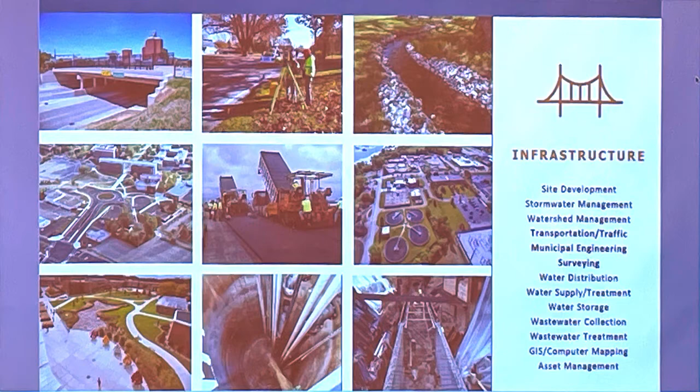As I mentioned with infrastructure, you can see a snapshot of the different capabilities within that division. The transportation and traffic, municipal engineering, and surveying groups all played a role in the work that led to our report for this assignment.

As a means of background, the work I'm aware the city performed prior to Fishbeck's involvement had to do with an accessibility survey published by Disability Access Consultants in October of 2019. They performed a survey of the two blocks of Louisiana we're talking about, and also issued a report, a copy of which I have here if you're interested.

They went through and developed a lot of the deficiencies noted within this corridor, and also provided an estimate of costs for some of the items they were recommending. That report served as the background for the City of Perrysburg's RFQ that was issued, to which Fishbeck, among others, responded in the fall of 2021.

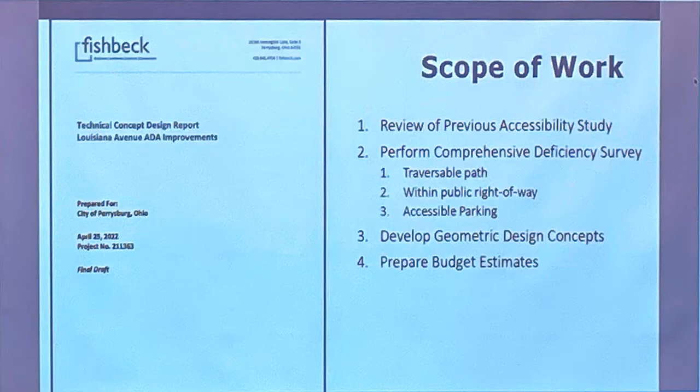Our deficiency survey was to focus on the traversable path. We were asked to focus on the public right-of-way alone, from building facade to building facade. Our contract was not to perform any sort of architectural renovations and how the buildings might be modified.

It was also not to look at the access beyond the public right-of-way, which in this case was the actual building line itself. So that's what we did, we were focusing on just public right-of-way. We were also asked to look at the parking, specifically the diagonal parking along these 2 blocks, and how the accessible parking spots could be modified to bring them up to current accessible standards.

As a result of all that field data, we were then asked to develop 2 different geometric design concepts. One we considered more of a base option, a minimalistic approach to dealing with the accessible issues on the corridor. The second option, which we called an advanced option, went into much greater depth on some of these items.

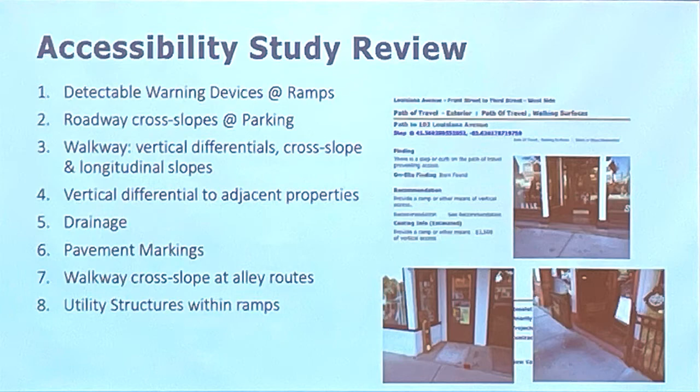We found that to be the case and would confirm that as well. Utility structures within the ramps were identified in many locations—manhole covers, utility handholes, things like that—right in the area where the crosswalks and truncated domes, or the detectable warning devices, are located. That is also a violation of current standards.

With that review completed, Fishbeck went out and performed our own survey in a much more comprehensive fashion. We had the benefit of the disability access consultants' work. Myself and another engineer went out there and did an inventory of the entire two-block corridor.

Furthermore, we employed one of our pieces of equipment called a terrestrial scanner. We were able to scan the horizontal surface of all the sidewalk and provide a heat map showing where the differentials were. So I can tell you with a pretty high degree of certainty where we had steps that exceeded a quarter inch, or where we had settlement of a piece of sidewalk causing a small puddle of water.

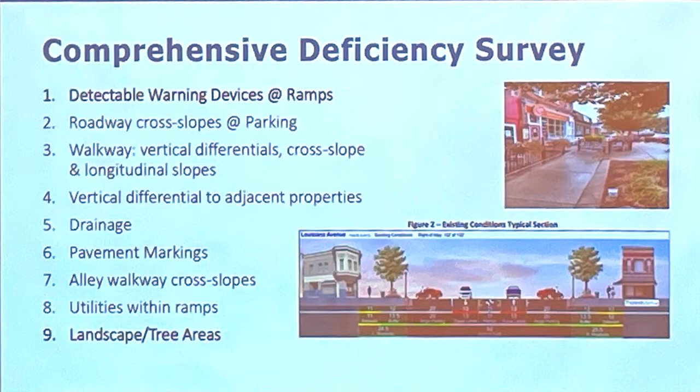Number 9 is one I wanted to include also. It isn't directly related to accessibility, but I think it's important to recognize that the larger trees and tree planting areas are much bigger than you'd typically expect in an environment such as Louisiana. Because of that, it's posing additional constraints on what we could do within the sidewalk to make the area accessible. I wanted to make sure everyone understood that even though we're focusing on the vertical differentials of the walk, we took a wider look at what the real constraints are.

I'm going to share a few slides with examples where the problem is over here, but the solution is over here. That's an example of going a little beyond the basics to try to arrive at a solution.

Looking at the cross section, we have roughly 25.5 feet of sidewalk area between the curb line and the building facade. The typical section is symmetric. You also have an 11-foot multi-directional left turn lane that provides access for that. This section provides a lot of opportunities and could also be used to our advantage should the city decide to move forward.

When we talk about a comprehensive deficiency survey, I felt it was important, since I know there's a lot of interest in these ramps and accessible paths, to share these two exhibits I took from the U.S. Access Board's ADA accessibility standards. This focuses on providing information you may not already be aware of.

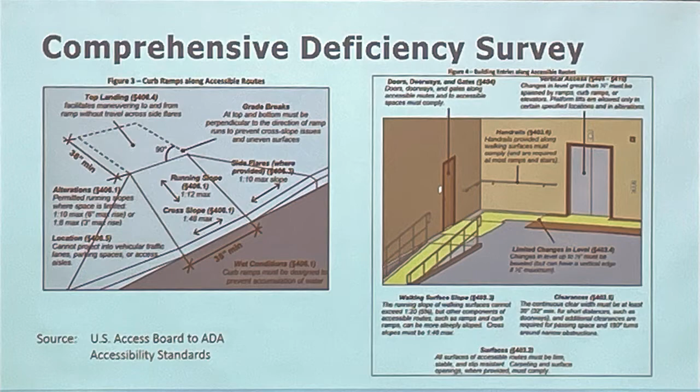In the gray area, limited changes in level. We had several instances where the disability access consultants indicated the vertical differential was 3/8 of an inch, and they marked that as deficient—which it is, because it exceeds the 1/4 inch allowed for a vertical differential. However, this section allows you to grind that corner. Say you're at 1/2 inch, you can grind it down to a 1/4 inch vertical with a beveled edge. That's allowed based on the standards.

So you may have seen sidewalks with a slight differential between pieces, where we've gone in and ground that surface. That's what we're attempting to comply with—we want the sidewalk to maintain its function as an accessible route, but we also recognize we can't have a vertical differential greater than 1/4 inch.

The last item talks about clear widths—36 inches, 32 inches on doorways. I mentioned earlier that our scope wasn't to look at the actual building itself, so I didn't take measurements to doorways and things. I don't know where we stand on some of those—we may have doors narrower than 32, or many much greater than that. I can't comment on the building itself; that wasn't what we were contracted to do.

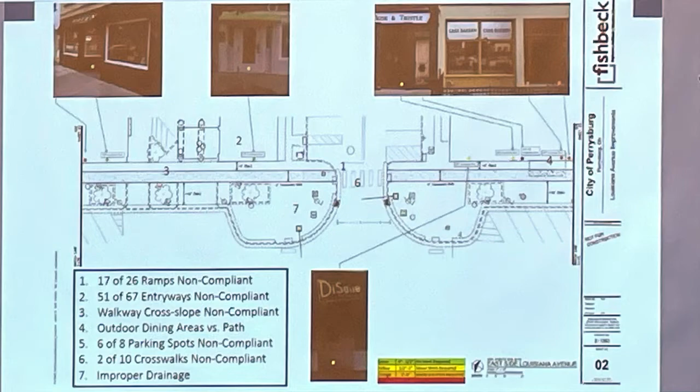When we got in excess of 3 inches, we got to 3 to 8, and in a few locations we have even greater than 8 - which, just as a quick aside, is also taller than what the Ohio Building Code would require for a stair riser. Typically you see risers 7 inches, 7.5. When you start getting into 8, 9, 10, that becomes very uncomfortable to navigate and relatively unsafe.

Couple other items - just to show you in this case, all along Cellos and Zingos and that area, coming up to Front Street, all of these entries were in that orange category.

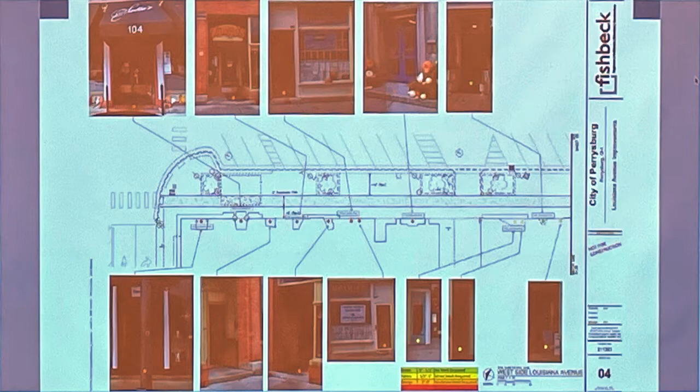So after we had all this data, I came through and tried to figure out, okay, so what do we do with the data? How do we go forward with this? How do we come up with some design criteria we can utilize to create recommended solutions to all of this item.

I tried to summarize side by side, as we were going through this, what was our philosophy behind the different options. On concept number 1, the base design, we were dealing with isolated ramps and landings. We were treating each of the entries that had a deficient vertical differential on its own merit - we weren't trying to combine multiples. We were trying to minimize the amount of work needed to just address the specific ADA accessibility item.

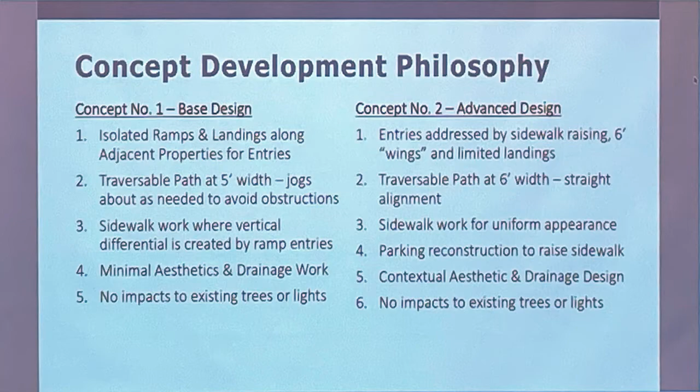Sidewalk raising, in the next slide I'll show you kind of what we're driving at there. But the wings, what I mean by all that is that between the edge of the traversable path and the building facade, we have 12 feet. So we can put in a 6-foot traversable path, and then we have another 6 foot between the traversable path and the building facade, which I affectionately call the wings. So we have a traversable path running straight down the sidewalk, and then on either side you can go up or down with your sidewalk because you're not impacting the traversable path. As soon as you want to turn and leave that pathway, that's where your 5% comes into play.

In this option, the traversable path was established to maintain the 6-foot width, and we best fit a straight, uniform traversable path through the entire 2 city blocks. The sidewalk work was much more extensive, done primarily to address some of the vertical differentials, but also to create a uniform appearance.

There's several examples out there today where it's concrete, but some is white, some is gray, some is dark gray, and it all has to do with there may have been some utility work done, which there was. We had some new gas service lines put in, and they repaired the concrete walk, but the concrete they used to repair it didn't look exactly like the concrete that was there before, and it serves to detract, in my opinion, with the look of downtown.

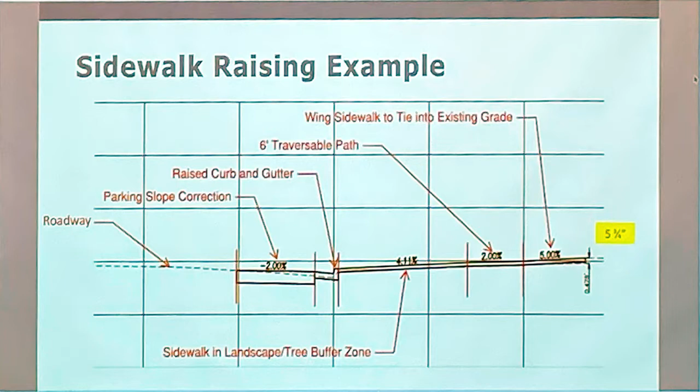But this is an example, so for your purposes there, that 4.11 and the 5.0, those numbers can change as you go in to refine what you're seeing there.

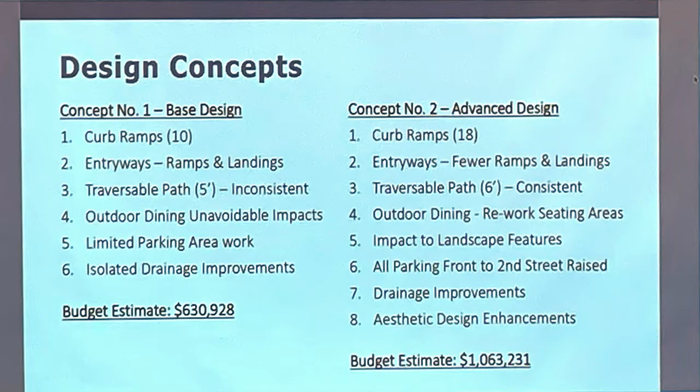This is what we came up with for the work items for the two different options: 630, a little over $1 million for the other one. Just for your purposes on scale, that budget estimate for option 2 has about 20% of it in for what I call contextual aesthetic enhancements. So it wouldn't be normally needed, but recognizing that some of that would be desirable.

So when we went through, these are exhibits that are prepared out of our report, and what you see here is the areas that are in that pinkish color, those are ramps and landing areas. Generally what we found is that we had several instances where you had an entry that was fully compliant, i.e. a green dot, and then directly adjacent to it, and in some cases as a stairway going up to an apartment or offices or whatever, you'd have a set there that would be in that 10-inch range.

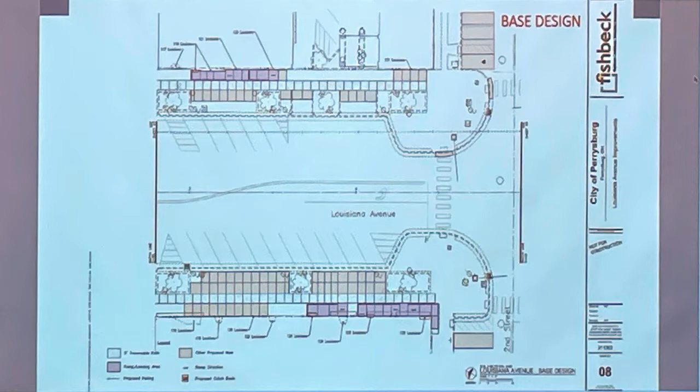So what we came up with here, these pink areas, was our recommendation on how to address some of those much taller, that 6, 8, 10-inch type vertical differentials. With the brown areas, that's reworking the sidewalk itself. You can kind of see it like at 120 Louisiana, we're showing the brown sidewalk there. That would be just changing the grades on the sidewalk to lift them slightly to meet the thresholds of that building.

One of the things, being that this is the base option, I'd like to draw your attention to is the pink ramp that actually turns the corner onto 2nd Street. There's a stairway as well as a concrete landing area on that corner, and we just felt it was good practice rather than not turning the corner, to actually tie those areas together. So that's why you see us turning there. You would have to do the same sort of thing to provide an accessible route to address that vertical differential at that stair landing as well. So we included that with this assumption, this option.

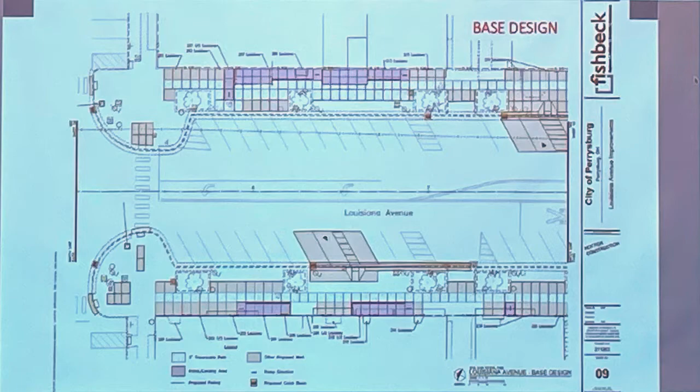So here's the examples of the accessible parking spots. We have an accessible parking spot, but I wanted to draw your attention to the fact that it's one accessible parking spot, but you actually have to work on three to deal with the grades that you're transitioning back into the existing, and also the drainage that is required in that area.

These small, somewhat isolated sidewalk pieces on the left side in both of those concrete islands, that addresses those little settlement areas that I talked about earlier.

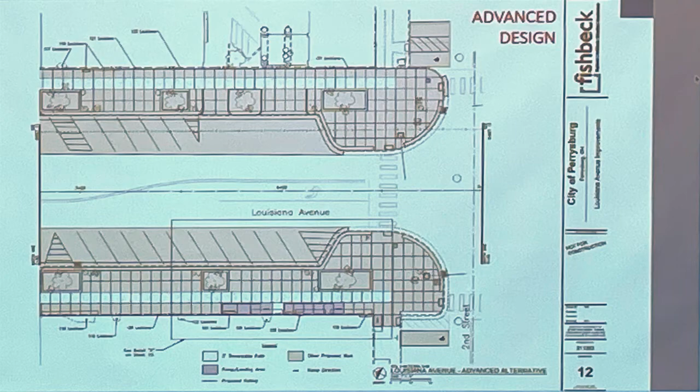This is the advanced design. Obviously, there's a lot more brown here. In the area between Front Street and Second Street, we're suggesting that you consider the diagonal parking, right? That's that sidewalk raising concept that I talked about. It also serves to address and greatly minimize the amount of landings and ramps that are needed in this same section.

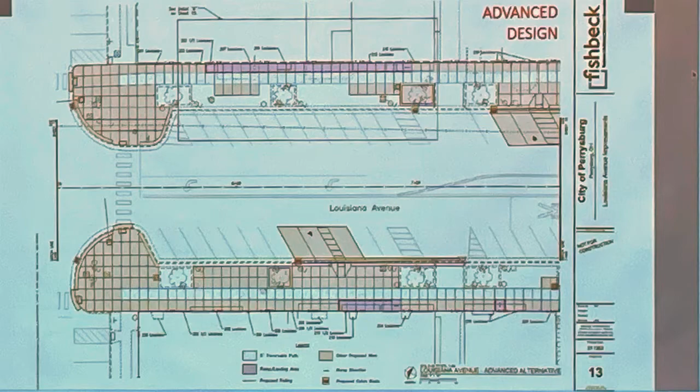Now, in this area, between Second and the tracks, you'll notice we haven't recommended the same treatments for the diagonal parking. That's because in these areas, with the exception of a couple of pink areas, raising the sidewalk really doesn't address the issue. We have several locations with a differential greater than 5 3/4 inches, so even raising all the sidewalk, we'd still end up with conditions that wouldn't be met with that method.

This is a rendering, a photo edit. It's by no means intended to be a design, just concepts to show you what I've been presenting.

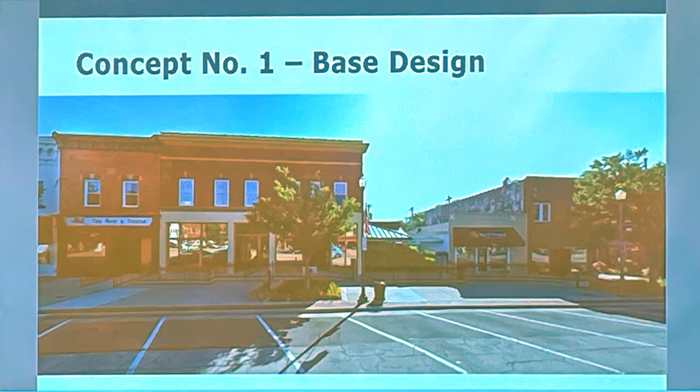You can see over to the left, this is the base design option. One of my philosophies was to maintain at all costs the outdoor dining areas. At the time of our inspection, Casa Berens had an outdoor dining area in front of those windows. Just to the left, I show a ramp leading up to that tan door. That ramp is perpendicular in nature because immediately to the left, at the Rose and Thistle, they have a flush entry, so there's no option to present a ramp going left or right—we had to go perpendicular to provide accessibility to that entry.

In this rendering, what I was trying to portray—right off the sign and the American flag there, just to the left—I've got an opening in the rail. That's intended to be a landing, and because we have an outdoor dining area immediately to the right, we're providing a landing there, a ramp up to gain access to the three entries in that area, since they were all within about half an inch vertically of each other. Another ramp is down to the far right in this option.

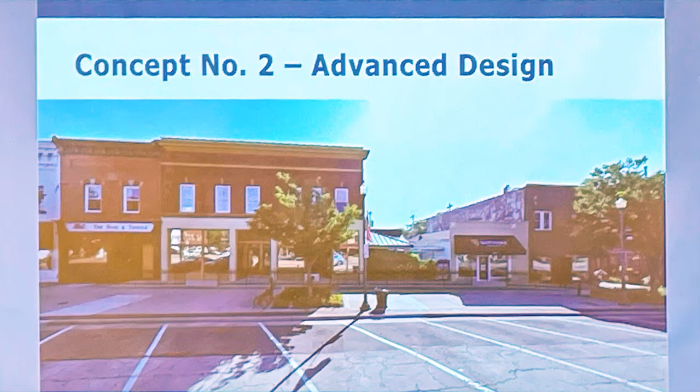In the advanced design concept, this differs slightly. Here we have a constant landing area across the entire stretch. There's a ramp to the far right, and I've provided a couple of openings—call them steps—but there's a uniform landing area providing access to all the entries along the same corridor. In this option, we would be in conflict, as I mentioned earlier, with those two dining areas that exist at that location.

So I mentioned there were additional considerations that I came up with. I'm nearing the end of my presentation.

The first one is the trees. I'm aware the administration is trying to figure out how to take care of the trees correctly. They're very large, and in conversation with the service director, they're not able to be pruned in a healthy manner. One consideration worth looking at is the ability to replace and relocate those existing trees with a tree more appropriate to a streetscape type element. In this picture, you can see branches almost touching the building elevation, and that's the case in several locations where the trees have just gotten very large and dense.

Another option would be alternate plantings—maybe the city would consider a few trees and then some planters. I'm even thinking of a possibility of forklift-friendly planters that could be utilized to help with outdoor seating, and could be moved periodically if a special event were to be hosted downtown.

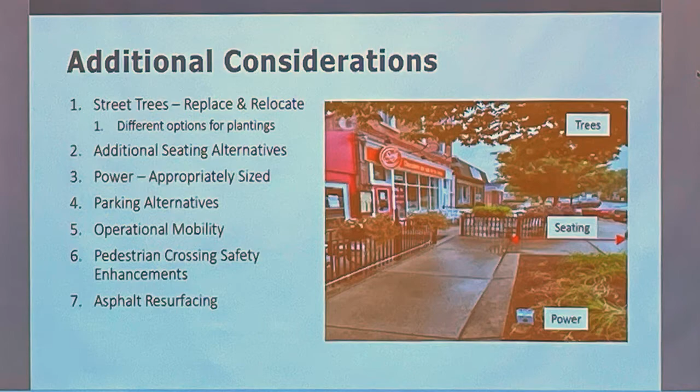Additional seating options—you can see where I've indicated there, this area could be used to a much higher level if we looked at the alignments and dealt with the trees, because right now the trees are a fairly significant impediment, not only to the cross slopes and the size of their plantings, but it seems like they're in the exact wrong location for outdoor dining areas.

So I tried to show that you have approximately 13 feet there, which, based on what I was seeing in our different areas, would be adequate for two rows of tables—you could do a fairly good size area in there.

The third thing was the power. Once again, talking to the service director, I understand we all love our farmers market, except for the service director, because all the power is undersized and it's routinely popping circuit breakers and that sort of thing. This would be an opportunity, if you're going into the trees themselves, to also talk about providing additional capacity in the electric to support what we're now doing downtown.

Parking alternatives.